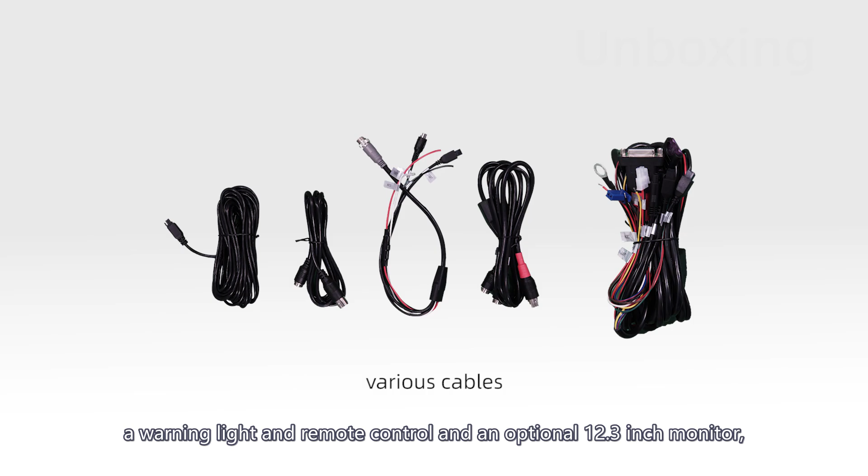First, let's open the package, which includes a radar, a dual directional camera, a control box, a buzzer alarm, a warning light, remote control, and an optional 12.3-inch monitor, as well as a series of cables. Before installation, we need to prepare appropriate tools, such as a drill, screwdriver, tape measure, level, or protractor. Choose a flat and open space for installation and calibration.

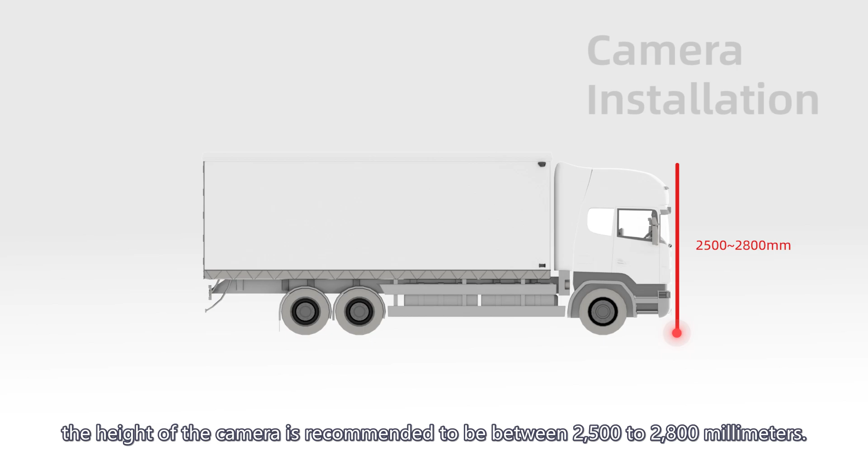When installing the camera, pay special attention to its height and horizontal distance from the front of the vehicle. The height of the camera is recommended to be between 2,500 to 2,800 millimeters. The distance from the front of the vehicle should be within 2,000 millimeters, with a maximum of no more than 5,000 millimeters, which is the suggested installation area.

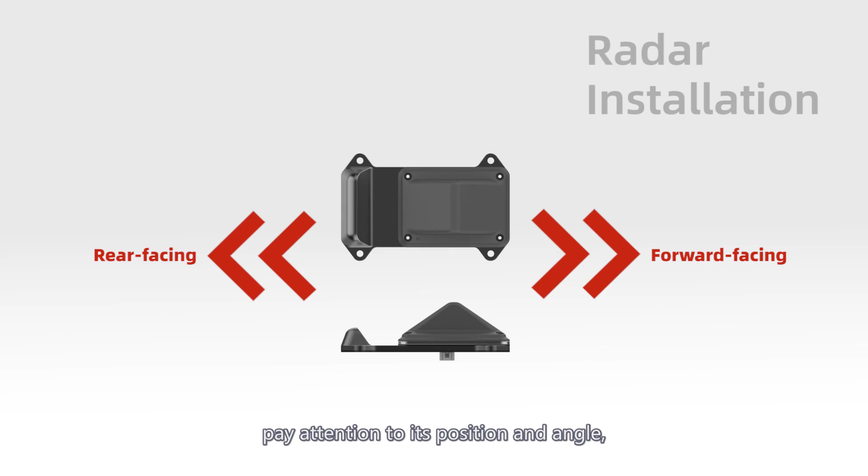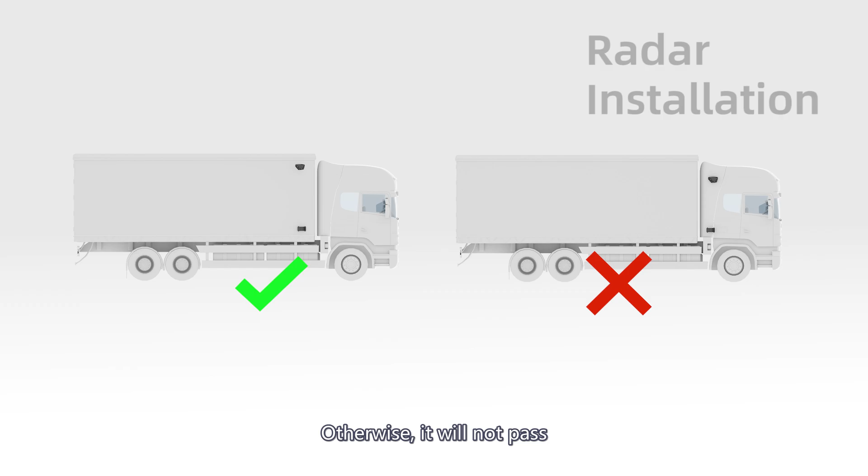Ensure that the radar is not obstructed by the vehicle body, otherwise it will not pass the certification of regulation R151. The allowable horizontal and vertical angle error is within plus or minus 0.5 degrees.

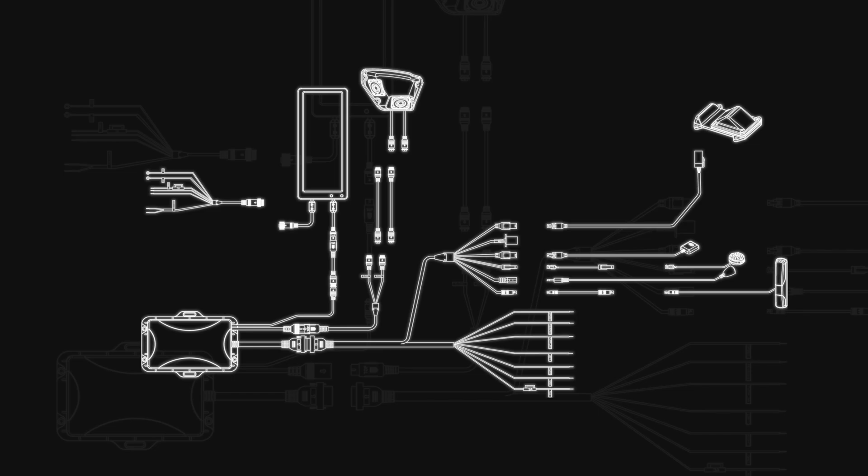Please follow the instructions in the manual to install the alarm kit, monitor, and place the control box. The wiring connection should be according to the assembly diagram in the manual. And the routing is recommended to be based on the type of vehicle, with buses following the recommendations in the manual and trucks routing from the main beam. After completing the installation, it is necessary to conduct a power-on test to ensure everything is working properly.

Next, calibration and adjustment are required. Taking the camera installation position as the reference point, with the ground as the origin, we establish the x-axis by extending in both directions along the car's direction of travel. Moving from the reference point towards the front of the car, we extend 4 meters to reach the first point, where we place the first calibration cloth.

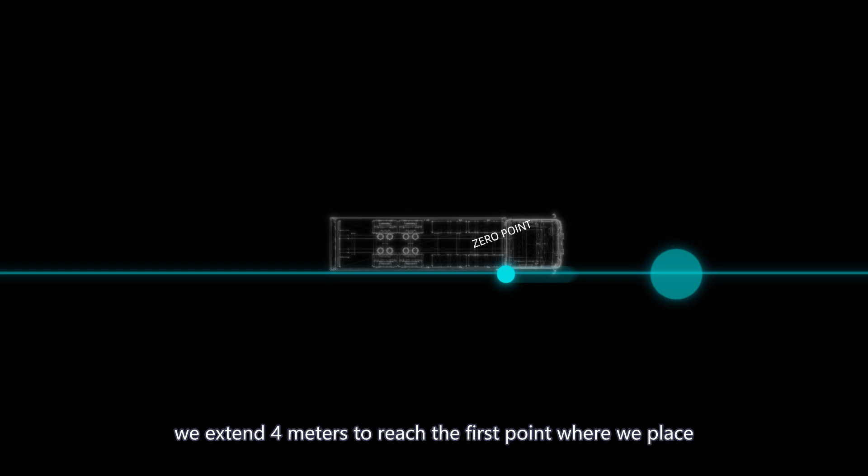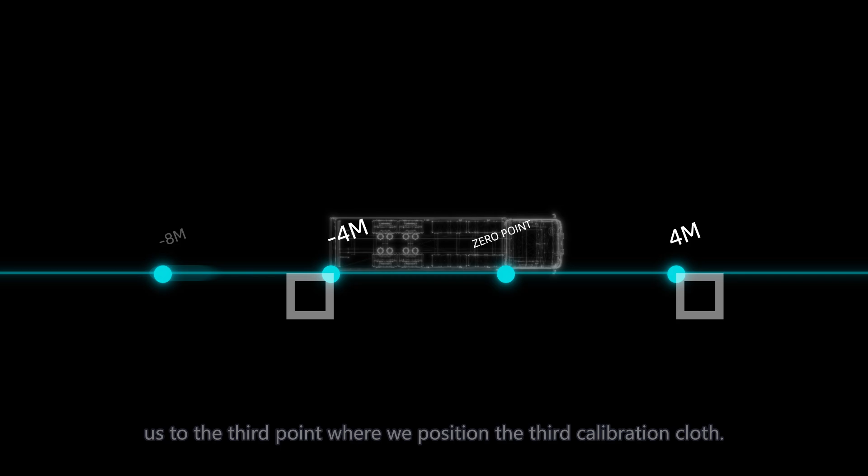Similarly, extending 4 meters in the opposite direction of the car's movement brings us to the second point, where we position the second calibration cloth. Lastly, extending 8 meters in the opposite direction of the car's movement leads us to the third point, where we position the third calibration cloth. Please ensure that the calibration cloths are positioned precisely as depicted in the diagram.

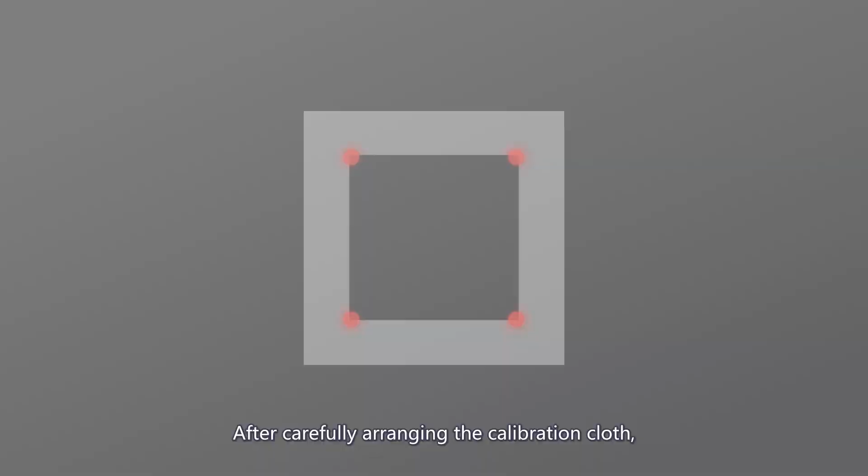When placing them, use one of the 4 outer points of the calibration cloth as the reference, rather than relying on the 4 points of the black rectangle. After carefully arranging the calibration cloth according to the instructions, we proceed to calibrate the BSIS system using the display screen and remote control. First, it is essential to verify that the vehicle's extension lines are properly displayed on the screen. If not, please attempt reinstallation to ensure correct installation.

Access the menu by pressing the menu button. Navigate to the settings section by pressing the right button and input the accurate vehicle length. Click the right button to enter the camera settings page. Based on the side of the car where the installation took place, select either left mount or right mount. In the position field, accurately fill in the vertical height, in centimeters, of the camera's installation. Use the directional keys to select the third option and choose to adjust either the front or rear camera. Press OK to enter the calibration interface.

From the front camera's perspective, 4 colorful cross-calibration points become visible. Select the reticle to be adjusted using the directional keys. The chosen reticle will be highlighted in green. Press OK, and the selected reticle changes from green to red, allowing you to move it using the directional keys. Press OK again to zoom in on the specific area for fine-tuning.